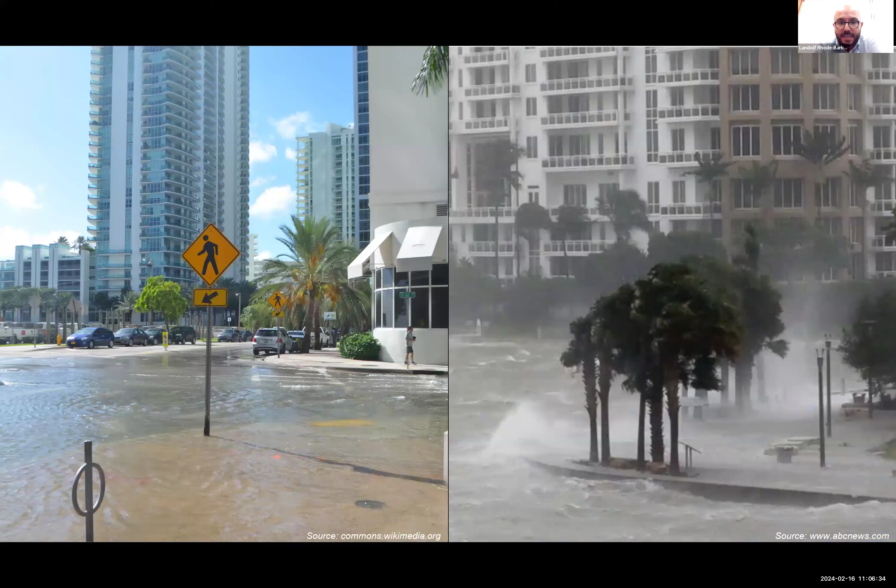Now, we living here know that sometimes this looks a little bit different, a little bit more terrifying, and now with climate change, things have been changing. We know that we have sunny day flooding, and we know that sometimes we have important storms that can cause important damages to the communities. So this is a wake-up call for everybody.

And for us here in Miami, and I would say in South Florida and a lot of other coastal communities, we start to live here, we start to live those impacts. So it becomes our everyday life. Luckily, we don't have important storms every day, but every year when you have to think about hurricane season, it's a reminder that things can change drastically.

And things have been changing, and we all know about climate change. For those who don't know, WHO considers climate change the #1 threat for humanity. So it's not only about what we think about climate, but in a broader sense it's a challenge for humanity. And the number of events, but also the cost of those events, has been increasing dramatically.

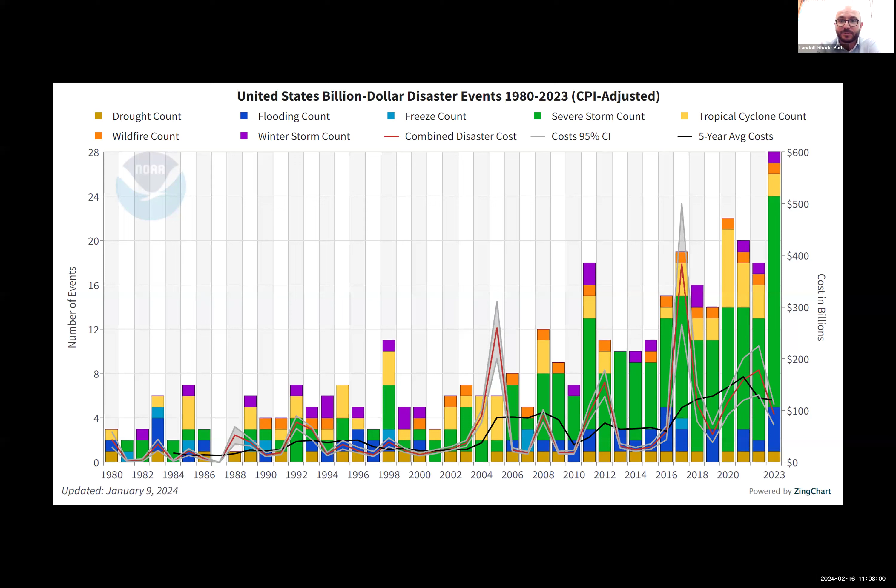So it's important to understand that things are changing and we have to act. This is the decade that we need to make change. We acknowledge that we're not on the right path right now, but we might still be able to recover, as all the reports are saying right now. And Florida is not in the best position, geographically, because of our hurricane-prone location. Here you can see NOAA's statistics in terms of billion-dollar disasters, highlighting the cyclones. The light yellow that you see there is reflecting exactly that we have a lot of storms that can come and cause a lot of damage here.

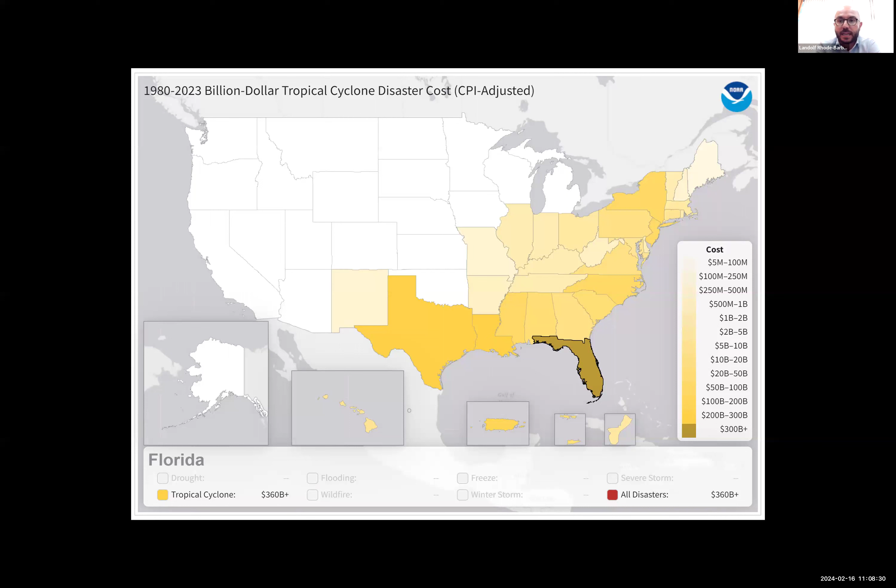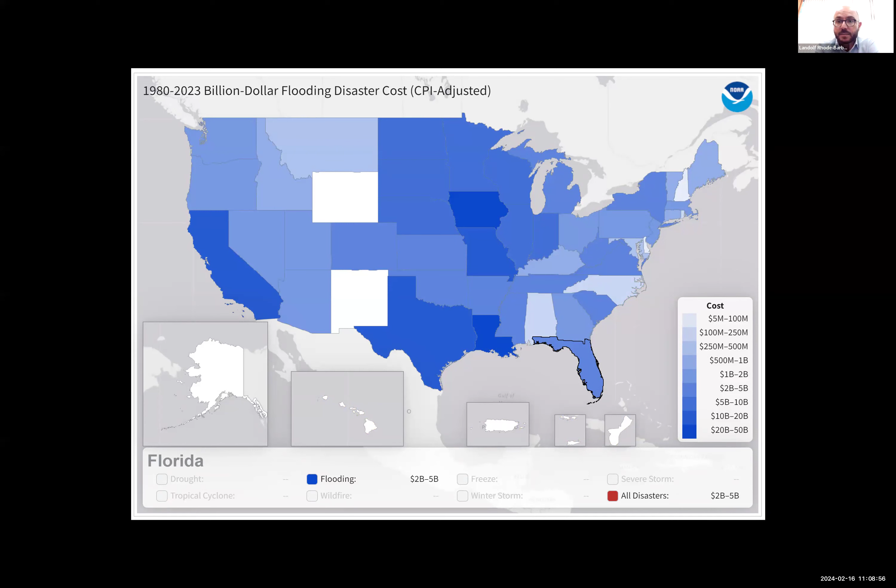Same thing with flooding, although this is flooding in the global sense. So you can see again that we're not the darkest there, but we have a nice blue shade there. Combining those, it's an important parameter for us to understand that we live in paradise, but sometimes that paradise is coming with some threats and some hazards related to the coastline.

And when we talk about those hazards, a lot of people think about flooding, and that map was just flooding. It's not just flooding. Flooding is basically something that we all perceive quite well, but then you have erosion, which is the removal of sediment, and that can cause even more damages, because if you remove the sediment, you might lose an entire structure by basically causing instabilities at the system level.

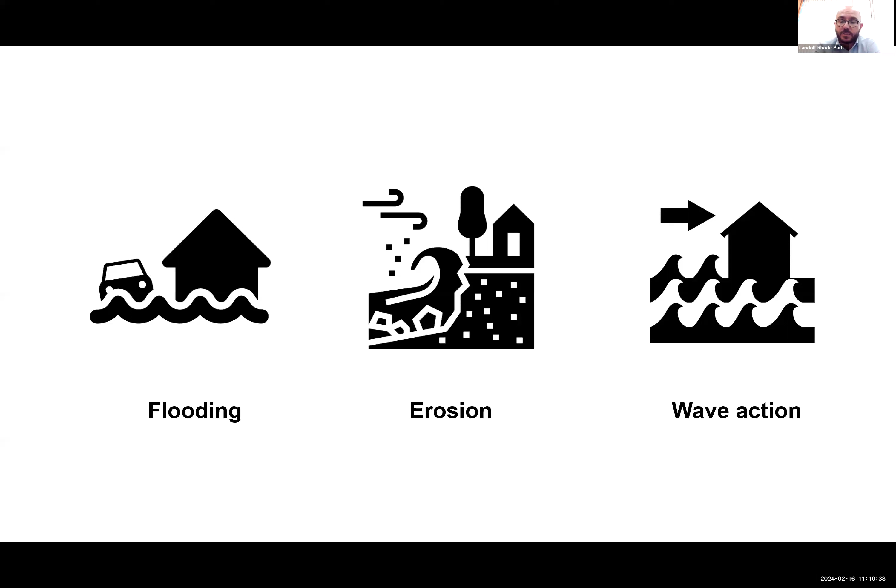And then we have wave action, which is basically the impact of the waves. I always come back to this analogy, but I think it is very important for us to understand why, while everybody talks about storm surge and flooding, it's not only about that—wave action is a critical component that amplifies indirectly flooding and erosion. Wave action is basically the energy and impact that the waves carry to the coastline. A little bit of physics and math there: maybe 4 cubic feet of water, 4 times 64 is approximately 260 pounds.

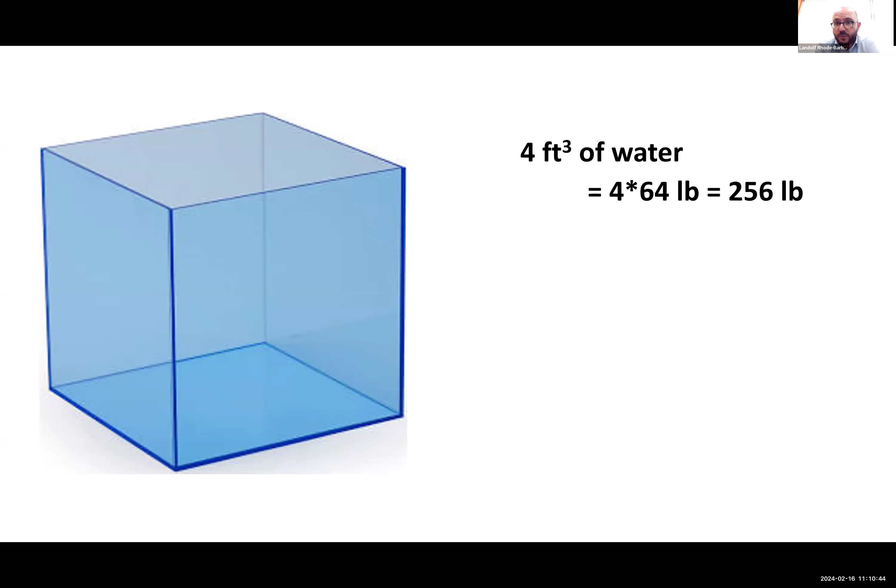And also, you know what else is around 260 pounds? Travis Kelce is listed at 6'5" and 250 pounds. So if you think about Travis Kelce coming and tackling you or stopping you from running, this is a terrifying thought. But I think this allows us to understand what could be the devastating impact of large waves. And again, it's not one player only—imagine that the sea is a sea of players. So the impact we can have from the waves is really, really important.

So that energy, that force, needs to be challenged and needs to be channeled somewhere else. Luckily, here in South Florida and in a lot of other communities, the environment is protecting us.

So this is a great image where you can see basically our peninsula, and you can see also what is, I would say, our number one defense. So we start with the coral reefs, and then we have other defense ecosystems like mangroves in our region. Seagrass is also helping a little bit, and then in other regions there are oysters. So again, nature itself is protecting us to a certain extent.

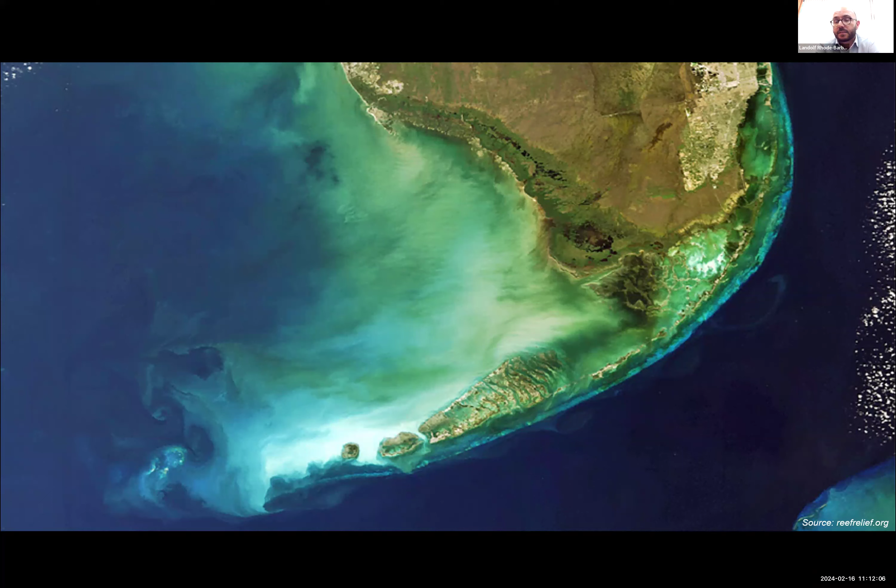So what happens with the coral reefs and the mangroves is they dissipate the wave energy before it reaches our shoreline. There are studies out there that have shown that the impact of coral reefs is quite important—they can dissipate up to 97% of the wave energy. And there are other studies that show they offer us protection benefits on the order of hundreds of millions, and in some cases this could be in the order of billions when the storms are important.

Same thing with the mangroves—the mangroves and their complex structure dissipate the wave energy. There are studies that show that approximately 300 feet of adult mangroves can dissipate up to 66% of wave energy. So having healthy coral reefs and a well-established mangrove forest along our shoreline definitely protects our coastline.

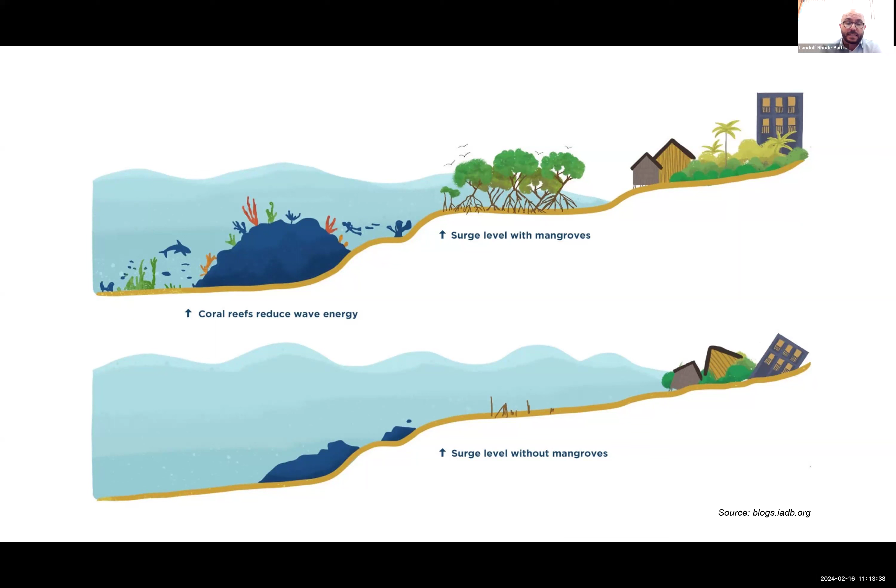And unfortunately, we know about the conditions of our coastline, the coral reefs, and the mangroves right now. And that is what we pay in terms of having the structure basically sustaining the wave energy directly, not being dissipated away from the shoreline. So the implications of that is what we're talking about today.

So if we are to analyze a little bit how this is happening, especially for coral reefs, we need to talk about the mechanisms that dissipate that wave energy. Here I'm highlighting that equation from the 1980s, which is about the wave energy flux. There are actually three parameters there, but two are the most important. One is about wave breaking, which is basically the wave forming and dissipating by that instability that we call wave breaking.

So as the particles of water advance, this instability occurs and the wave will break. So the kinetic energy will be dissipated in a very efficient and drastic way. And you also have the friction on the bottom, which comes through the complex structure that the corals create and all that rugosity and drag that goes with that. So these two parameters are critical for us.

And of course, losing the reefs means losing structural complexity—you lose structure basically, so you don't induce as much wave breaking and you lose friction. That is what allows the waves to propagate to a bigger extent. And of course, when we have storms with storm surge, the efficiency of those parameters is also changing.

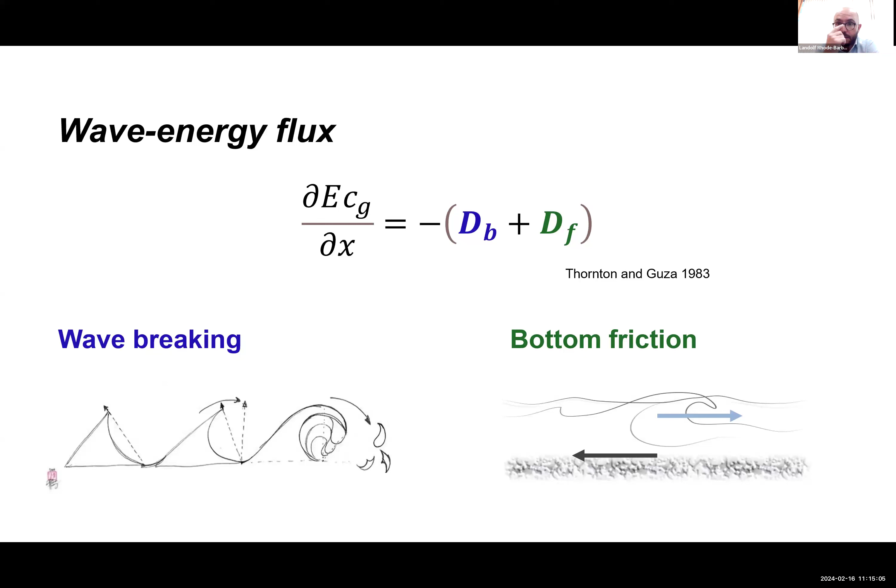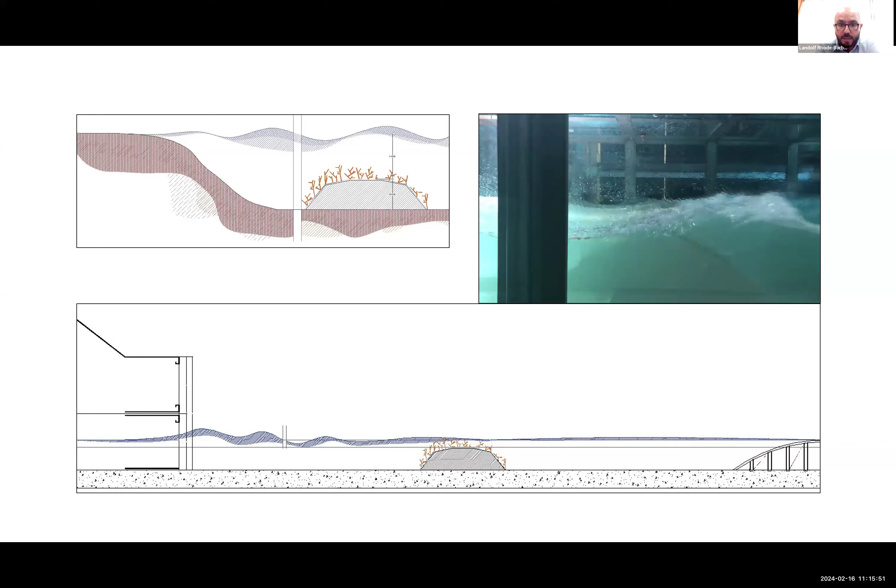We took measurements before and after, and we also did something quite unique: we ran the same model without the coral skeletons and the same model with the coral skeletons, trying to isolate exactly the impact of those coral skeletons.

So what we quantified is the percentage of wave energy dissipation provided by the coral skeletons. With the staghorn corals, we were able to show they can provide up to 60% more wave energy dissipation compared to the bare reef model on the left side. Quantifying this and giving numbers is critical, not only for making the argument, but also for understanding and tailoring expectations.

In the scientific community we understand some things, but when we communicate to stakeholders it's important to educate them that coral reefs protect us, but the performance fluctuates because it depends on multiple parameters - not only the corals and structure, how big and dense they are, what type of corals, but also the depth, how big the waves are, and so on.

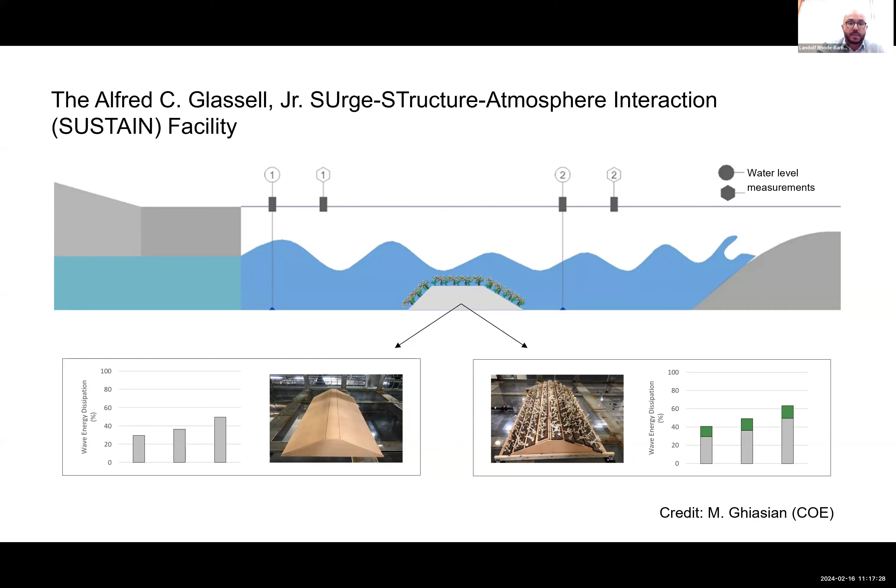So the hydrodynamic parameters that come into play are just as important as the structure itself. And we were able to test different structures and different corals.

Here you see a comparison between what we call brain corals - the rounded ones, which are a little more aerodynamic and, as expected, dissipate less energy - compared to the staghorn corals that are branching out. The complex structure of the branching corals creates more drag and dissipates more wave energy at the same density, so we compared the two.

Now there are interesting things there - I'm not the expert on this, but we can talk about which breaks first or which develops faster, and whether one outperforms the other. But studies like this allow us to make the argument for coral restoration for shoreline protection.

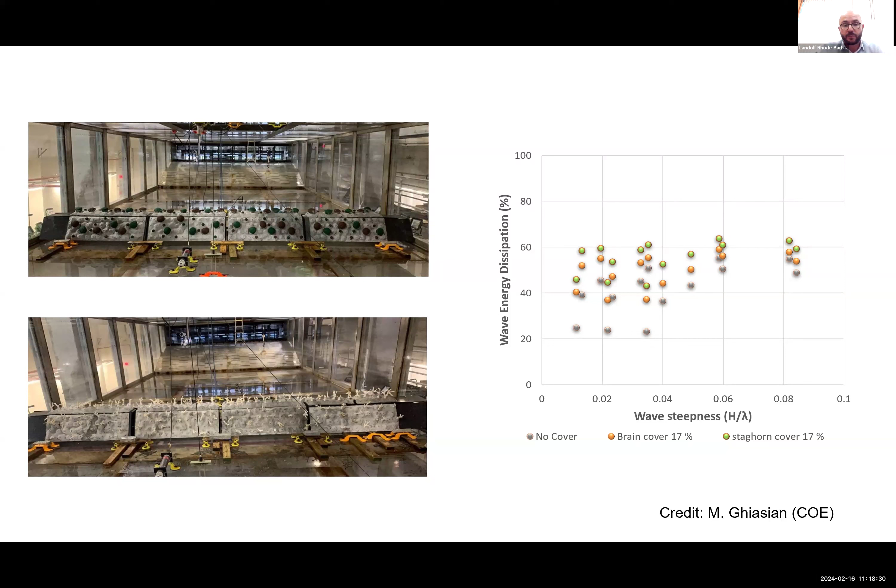So quantifying the impacts, how much we can get, what we should use - not only from the perspective of resilience of the coral, but also from the perspective of performance for shoreline protection - is very important.

So why are we talking about this? Where does SEAHIVE come in? Green infrastructure like corals and mangroves is vital because it provides protection and other ecosystem benefits. But let's focus a little on protection.

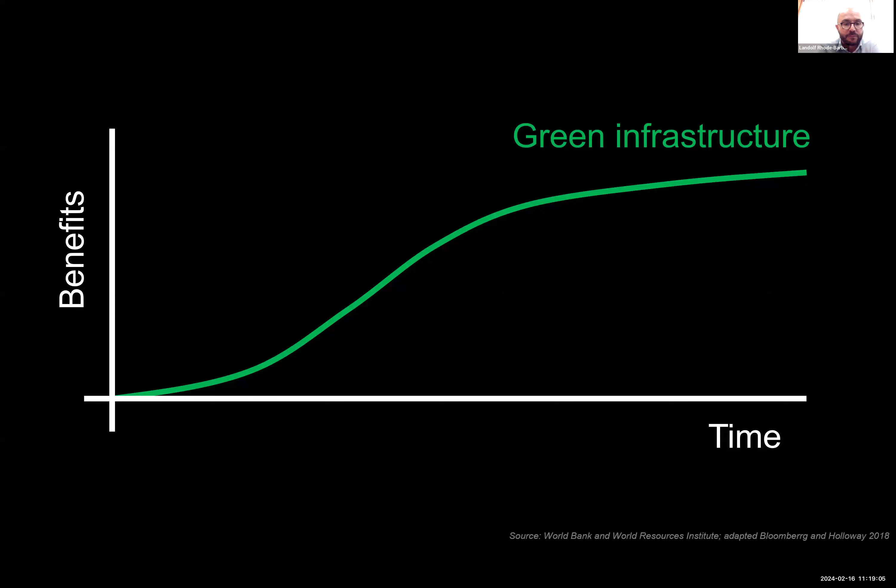The issue with green infrastructure is that it takes time to develop, and there are a million parameters that affect its development - natural parameters we don't control. Our gray infrastructure, on the other side, is established in a certain, shorter time through the construction process, and then yes, it degrades, but it's a little less sensitive to fluctuation of those parameters.

We cannot simply compare, and I'm not defending gray infrastructure over green. What I'm saying is that gray infrastructure allows us to get the baseline performance in a shorter period because of the construction. If we could actually get those two to merge, that would be ideal, because then you'd have all the ecosystem benefits and other protective benefits from regeneration that could add to the gray infrastructure.

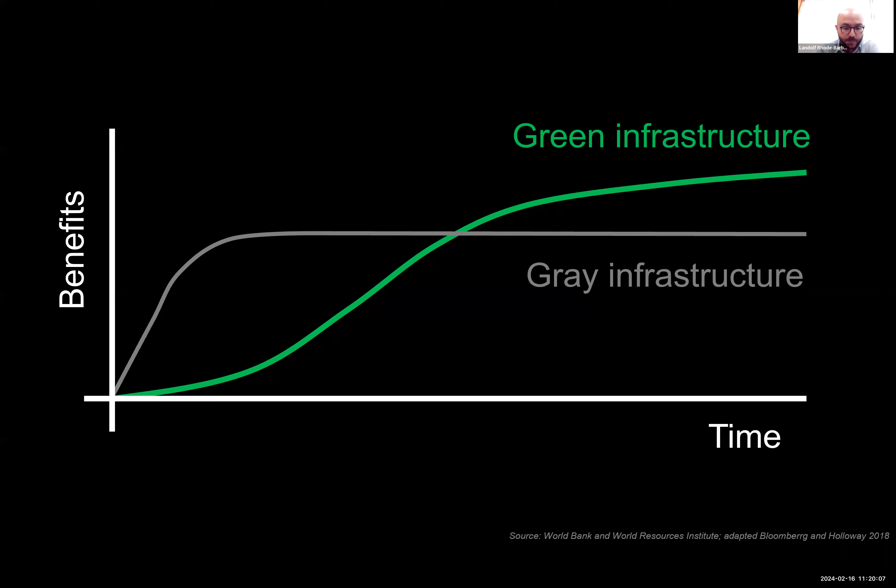So it's not one versus the other, but rather how we can do this together. This is what I would call the holy grail of coastal infrastructure and sustainable development: how can we develop protective structures that not only dissipate wave energy and protect us from the impacts of waves, but also create habitat?

And creating habitat means integrating different ecosystems. This could be seagrass, oyster reefs, coral reefs, or mangroves. Depending on the region, this will change shape.

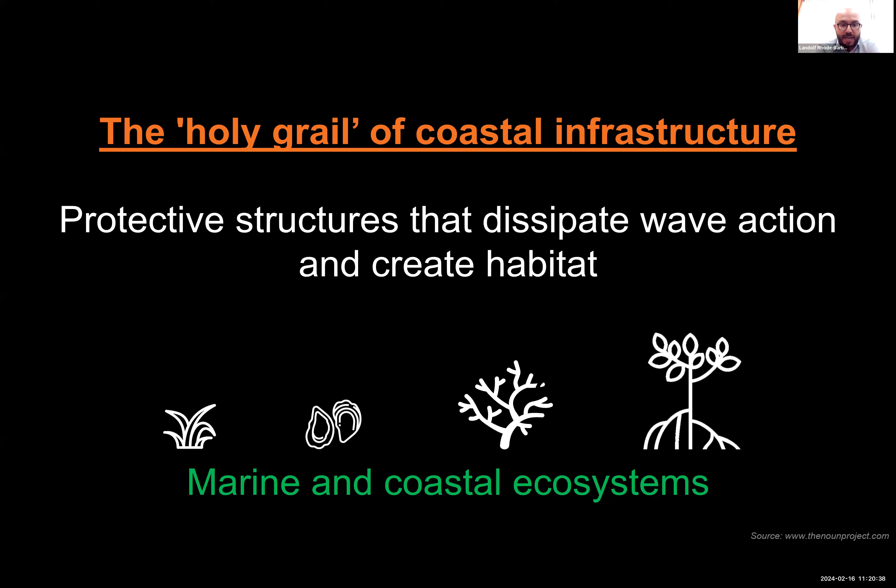Why this is the holy grail, and why I think this is quite a new challenge for us, is because we have always been designing with humanity at the center. We've been designing structures because of us, the way we think about structures and the way we want to use them. We define structures the way we like them, using forms that work with our activities and materials that we developed, that we can live inside and that protect us. But at the same time, this is quite unique if you start thinking about this layout with respect to nature.

So there is a change in the paradigm. Now what we need to do is basically put nature in the center, and that is the big challenge. There are no design guidelines about how to do that the right way. So we need to rethink basically our entire way of designing structures and infrastructure, and that causes a lot of challenges.

So we need to think about the structure and how it will interact with nature, the forms we will adopt, and which forms nature will use and for which purposes. The materials have to be such that nature can populate them, or at least they're not harmful. And there are also forces there.

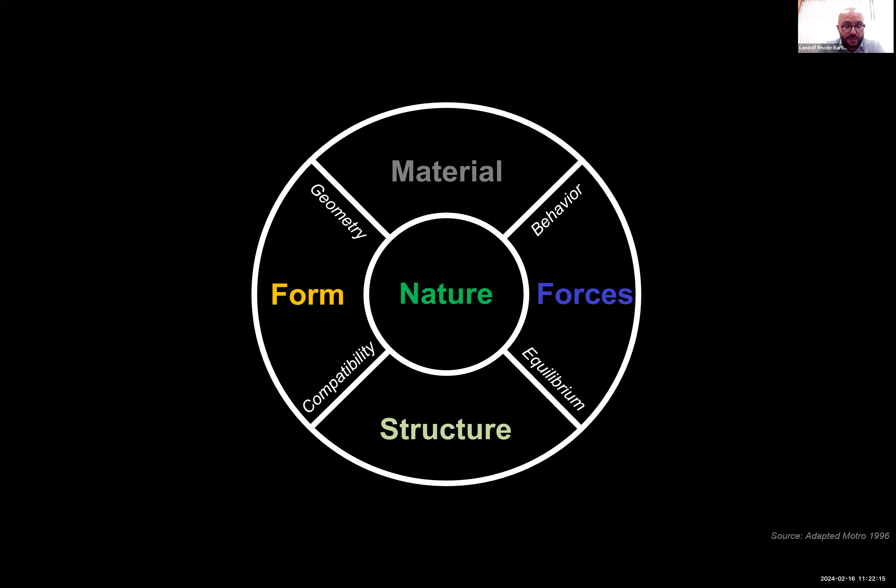This framework comes from one of my advisors, who was using it to evaluate structures and landmarks, and it also has another, let's say, outer level.

Now we have technology and technological advancements at all levels, from structures and forms. Now we can create free-form structures, and we have advanced materials with unique properties, and we can do a lot more simulations. We can use forces in a different way.

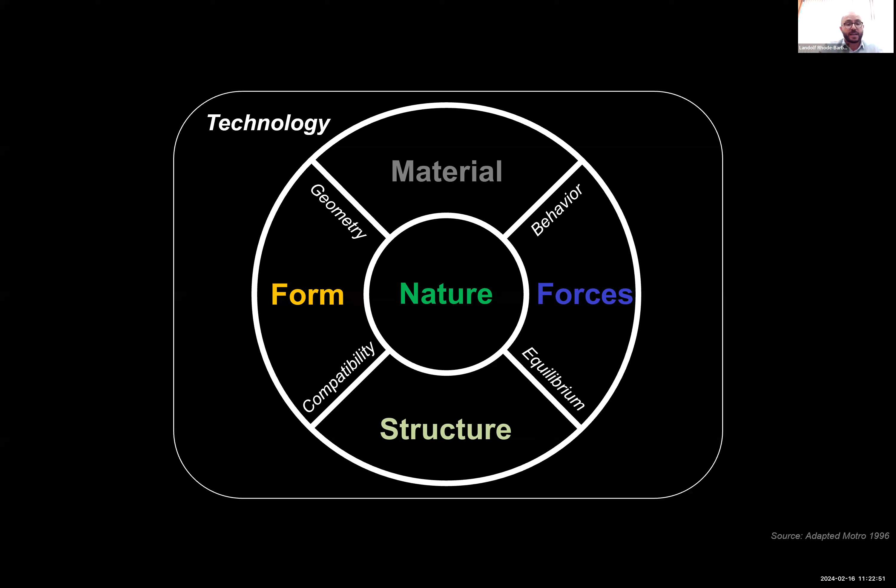But the fact that we have all these advancements does not necessarily qualify them for us to use. It's not because we can that we should. So there's this rationalization that we need to have.

A lot of times in architecture, this is a debate about what we do and how we do it. Coming from the engineering side, and a little bit more on the form-follows-function principles, I think this is a very important part of this discussion.

So the rationalization of the form, the material, the forces, and the structure is very important, because we want to create something which is robust, scalable, sustainable, and also equitable—in the sense that if we want to deploy something at a larger scale, that's where things become very challenging.

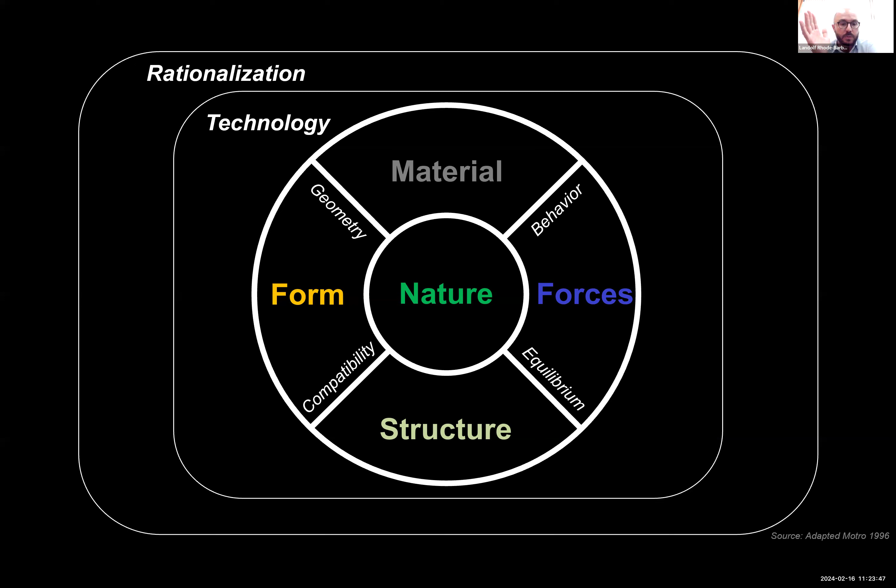So it's not only about creating something at the state of the art. There could be solutions that are very simple that we can integrate and still have a large impact.

Now, this is how I see SEAHIVE. SEAHIVE was developed through discussions that we had here at the department, and I'll give you a timeline. It was a collaborative effort.

Tony Nanni, our chair, Steve Nolan from the Florida DOT, Brian Haus, Prannoy on the material side, and Esber were all involved. We had discussions about what SEAHIVE actually means and how we get there. SEAHIVE is known for its hexagonal form, reflecting the beehive—so we use the hexagonal form.

I'll show you some figures around the development of the form. The idea was that the hexagonal form should have advantages, not only because it distributes material in an efficient way, but also because it allows us to create continuous tiling. The fact that we can create tessellations without gaps enhances the stability.

Then we have perforations on the sides that we've been trying to understand and tailor to the hydrodynamic conditions, allowing water to go in and dissipate the wave energy.

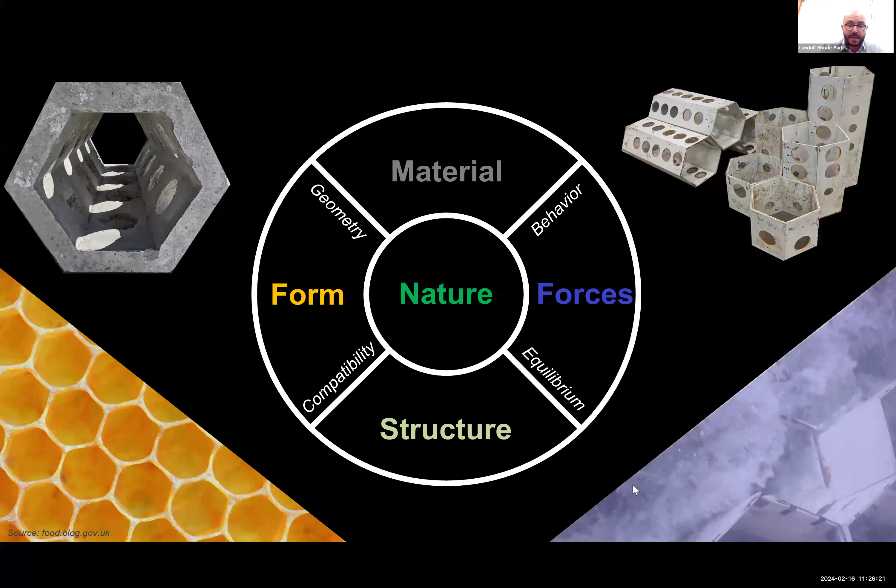So doing simulations and quantifying what would be the impact of the forces and how these structures interact with the waves. So this is a timeline of SEAHIVE, and there is sometimes a little bit of confusion, but SEAHIVE was

funded in 2018 through the National Cooperative Highway Research Program in collaboration with the Florida DOT. That was back in 2018. Throughout 2020, we did the testing in SUSTAIN. In 2021, we secured some pilot projects here in South Florida. And now the last year we deployed two, and we have one more currently in preparation for deployment, with some more to deploy.

There are some new sites that we're going after. Now, SEAHIVE, quickly we realized that it's not only a revetment. So when SEAHIVE was first funded, the idea was to develop a sustainable and efficient, in terms of hydrodynamic performance, revetment. And revetment refers to those sloping structures.

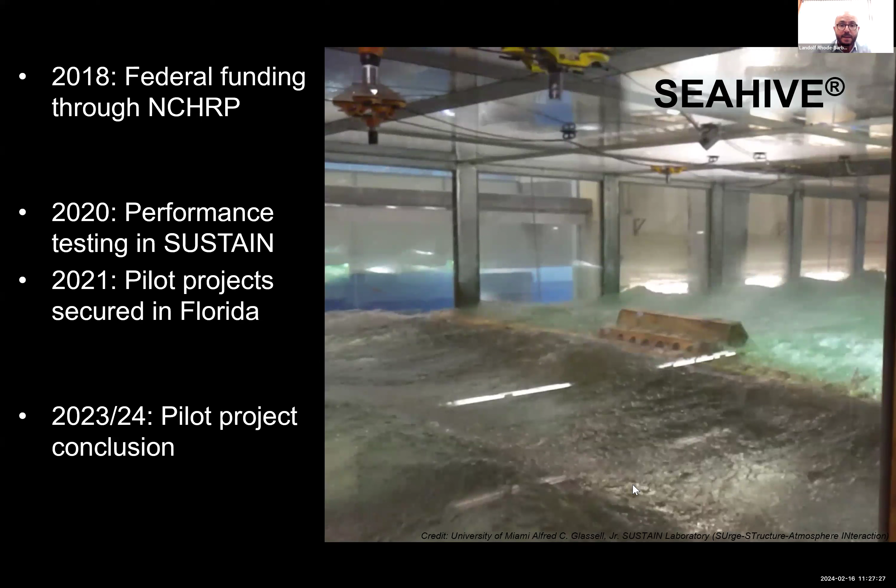But SEAHIVE actually intersected with other projects. One of those was in 2019, a U-Link project on coral reefs. This was kind of like a first initiative from the University of Miami, bringing different people together. I had the pleasure, and I'm still working more and more with them, to work with Diego Lirman, Andrew Baker, and Brian Haus, and others later on this adventure around coral reefs.

So we were talking about the impact of corals, and we soon understood that developing a coral reef just with corals will take some time. So we shifted towards hybrid coral reefs. That's where SUSTAIN was a critical infrastructure component, because we were doing testing for SEAHIVE, and then we were doing testing for coral reefs. So then why not combine the two? And that's how the idea of using SEAHIVEs for coral reefs was born.

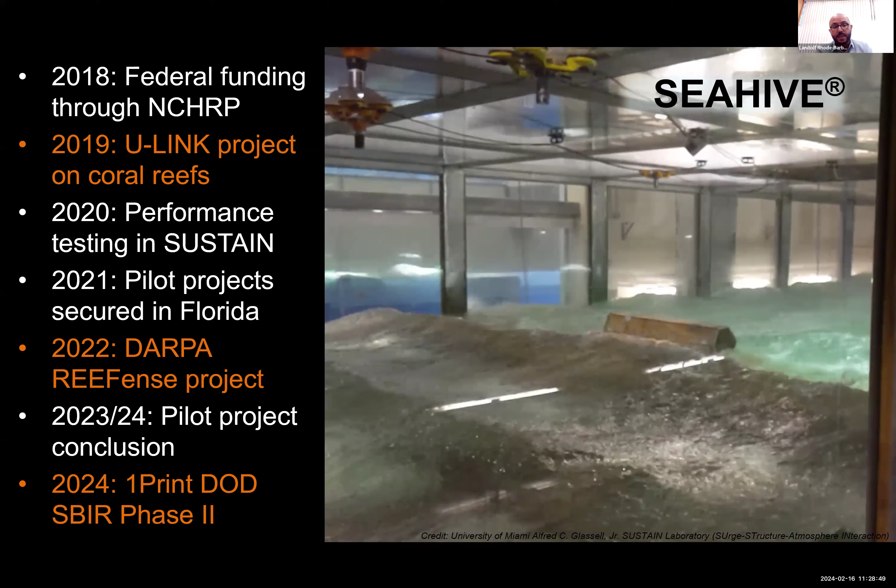Then in 2022, there is the DARPA REEFense project that you might be aware of. This is the largest of the hybrid coral reef projects that we have. And more recently, now in 2024, we have a DoD SBIR phase 2. This is with 1Print on basically 3D printing concrete hybrid structures like SEAHIVE.

So going back to the original project, we didn't go directly with the hexagonal shape. We actually tested different shapes. We tested square, we tested round shapes, we tested the hexagonal, and we tested different perforations, both in terms of the porosity, changing the porosity, but also changing the way you get that porosity.

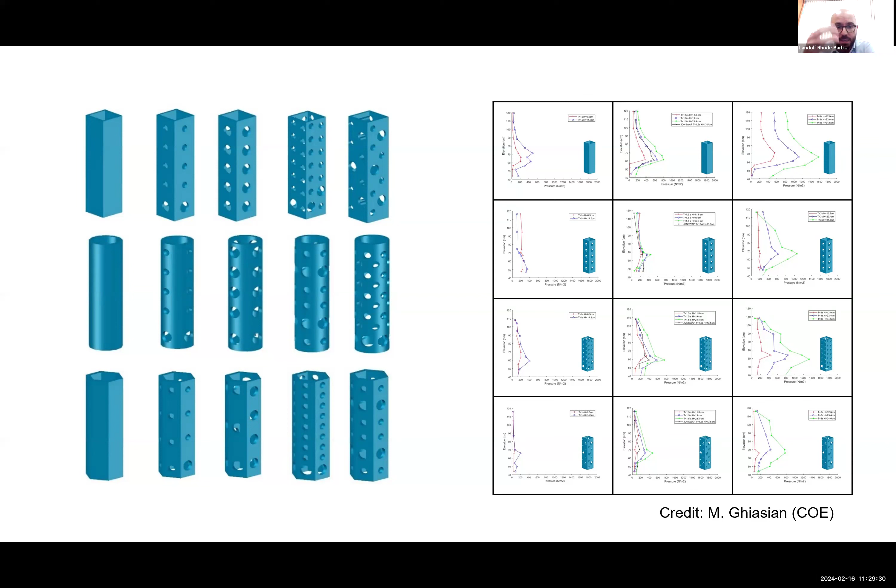And we were doing some testing of the pressure and the impact of the waves. But of course, having only a monopile there is not the right way to go because you need a system behavior. So then we started focusing on different systems and how we actually populate a structure using a modular unit like those hexagonal piles.

And here you see some of the testing that we did. We did this at different scales. We were measuring the wave height before it reaches the structure, after it bounces back, and if it's a fully perforated model, what happens after.

We were able to show that the relative wave energy dissipation you get from a SEAHIVE model versus a traditional solid seawall is a lot more, because the perforations allow the water to go in and dissipate, but also reflect less. So because of the geometry of SEAHIVE, you have better reflection and dissipation.

So we were able to quantify this for different wave characteristics, different depth conditions. We were playing with different parameters. That's the uniqueness of having something like SUSTAIN. You can create your own conditions, you can create extreme conditions, or play with one wave and see directly what is happening there.

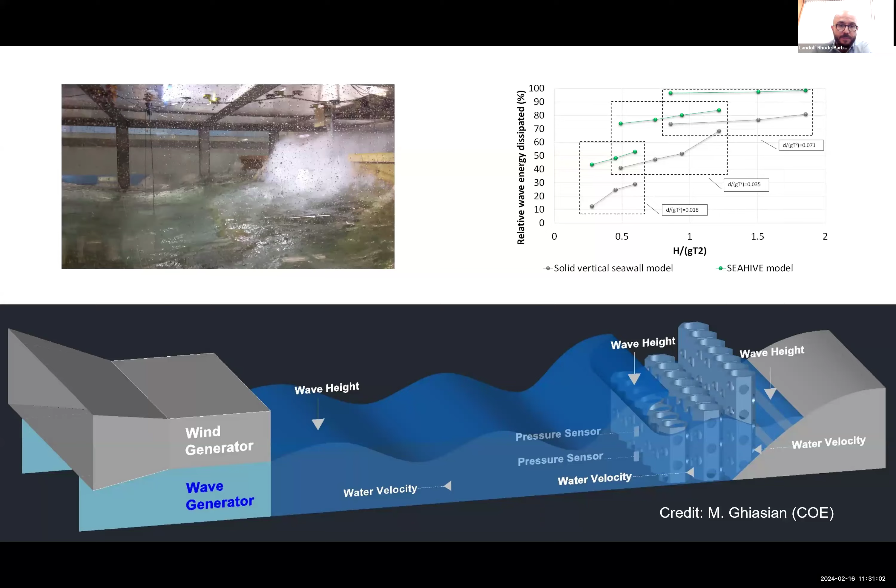And on the pilot side, we had the opportunity to deploy what we called ECoREEF. ECoREEF was the outcome of that idea of hybrid coral reefs. This is how we imagine it at some point. There are two types of structures, and there are also these trapezoidal structures that you see in the background.

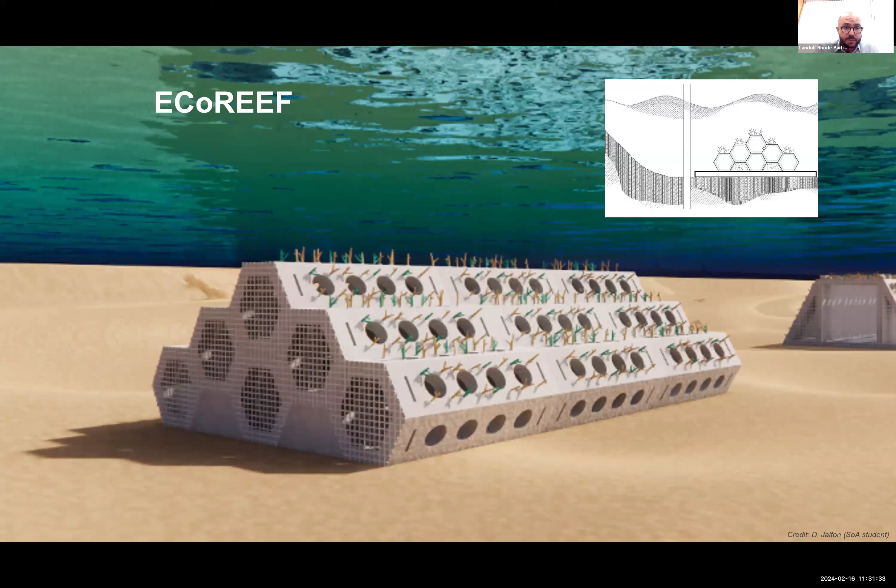But it's not like that anymore. The good thing, as some of our colleagues like to say, is these are really nice fish aggregation devices. Shortly after installation, the fish love it.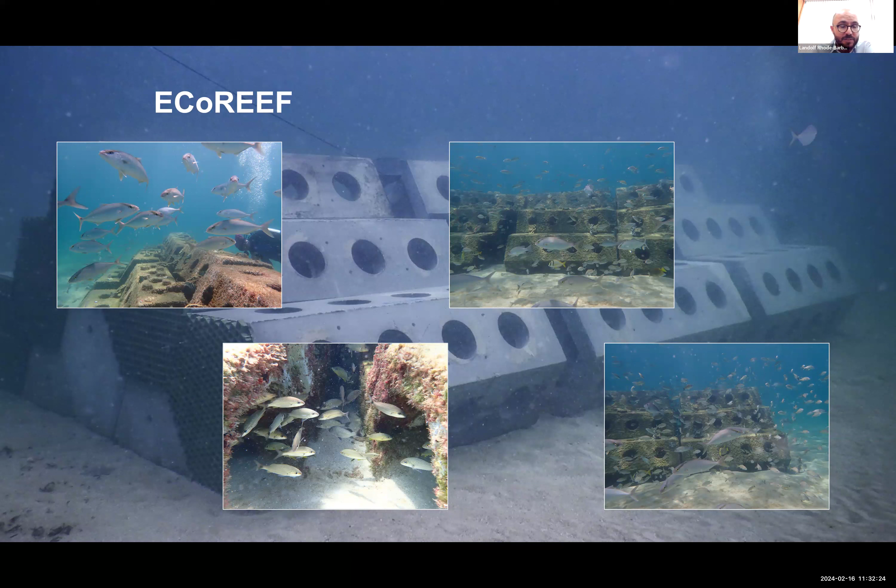It creates habitat for them because of the structural complexity that we have. You can see that we moved a little bit. This is all natural - it's a small installation. We're learning a lot of things, but what's interesting is that it starts to create habitat. I asked Diego to give me a little bit of what they've been observing on that site.

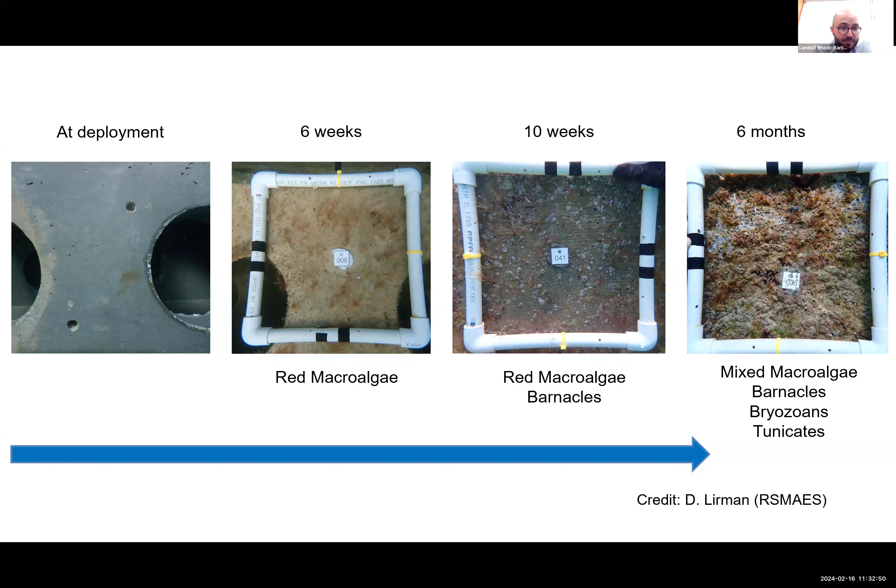You can see here a little bit of the recruitment, and of course there are different algae and barnacles developing there, populating the surface of those structures. So you can see how clean it was at deployment and how different it is right now.

We're also doing this with the purpose of creating a living reef. So the team from Rosenstiel has been deploying different corals, and here you can see how these corals are growing.

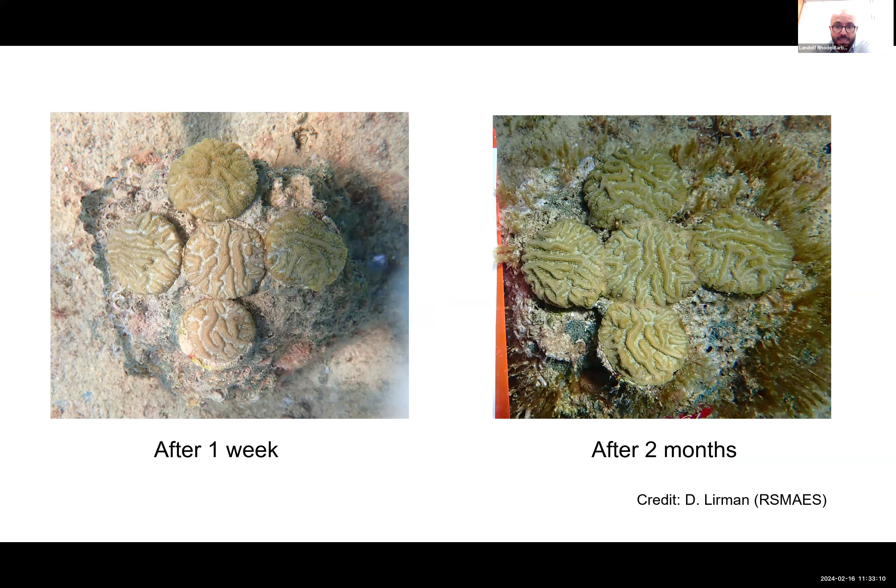We also have, I would say, good results with respect to the survivorship, especially after the extreme temperatures that we saw last year. I'm not the expert to talk about this, but I think it's very important to talk about the ecological wins that come with projects like this.

And the corals are doing great. The structure is providing the necessary platform, and this is something that we're really proud to report.

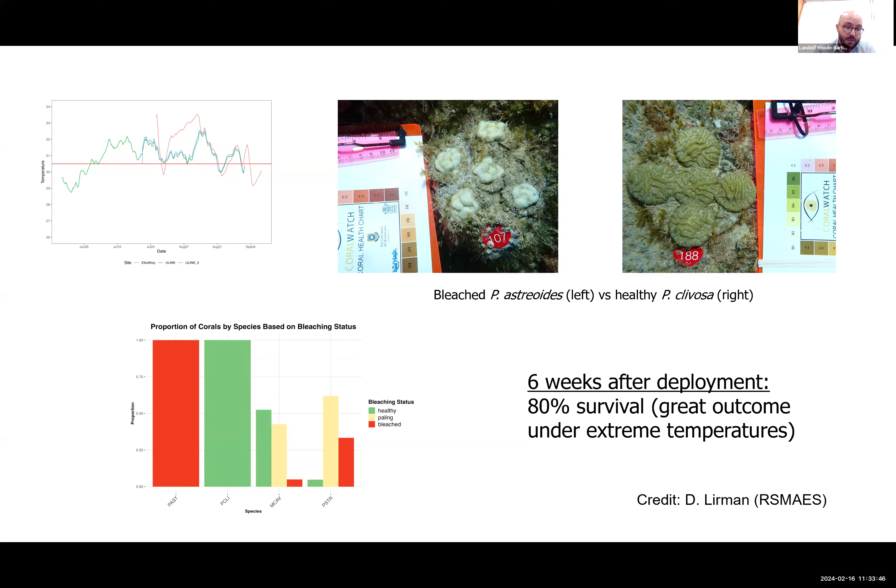Again, this is an experiment, so success is not yet guaranteed. I think we're learning a lot of things, and we will go back to the drawing board and reshape some of this to have better results.

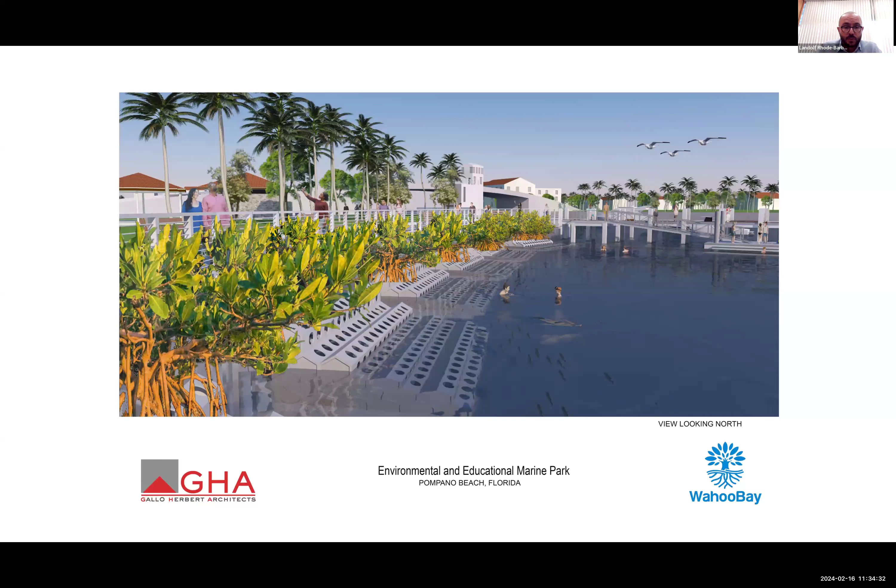The other project that I want to highlight is Wahoo Bay, which is shown here from this rendering. Wahoo Bay is a community marine park. We got into this project through the SEAHIVE expert panel. The county had this idea of creating this marine park with Shipwreck Park in the city of Pompano Beach.

And they were going to implement large culverts. I think they were intending to have a series of them with 10 feet diameter, which they were going to put there, fill in with sediment, and then plant mangroves.

If you want to create something, typically you need a sloping structure so that you have enough stability to support the weight of the soil and sediment that you put in there. So creating something with less footprint is very important.

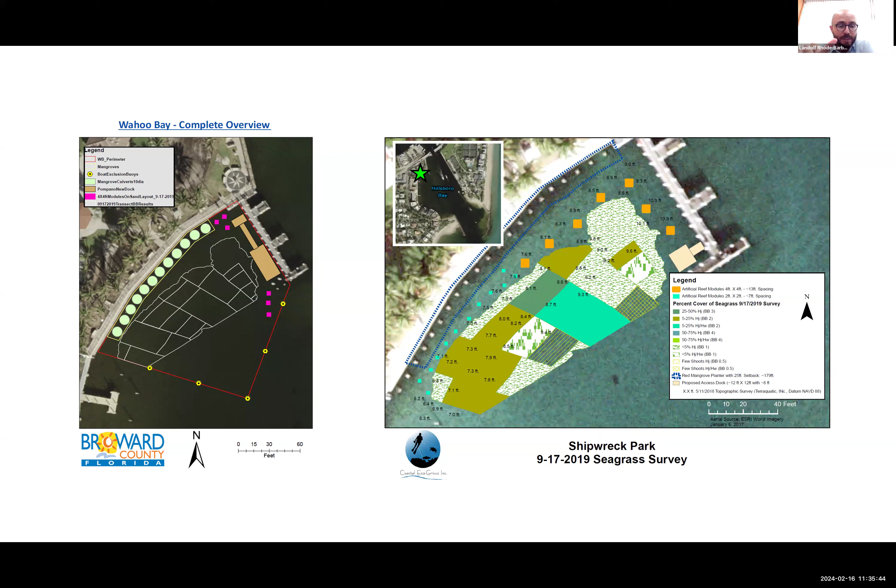This is actually one condition that we find in a lot of our canals and around our coastline, because typically our canals are quite deep. So creating that sloping structure requires a long footprint.

This is what we proposed to the community in terms of design: putting some solid SEAHIVEs at the bottom, reaching the level of the intertidal zone so that we can have the mangroves develop there, creating that protection to a certain extent with limited footprint. So this was well received.

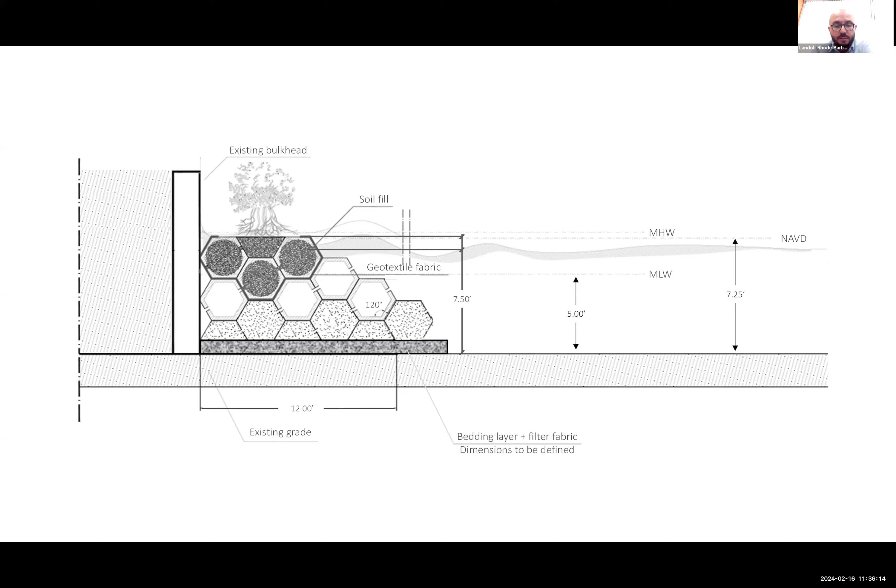So jumping now into the installation - but before you go into the installation of any pilot project, there is a big leap, which is all about permitting and discussing with stakeholders, including the permitting agencies, about what you're trying to do, how you're going to do it, and compliance with the regulatory framework.

It is important to go through that exercise, which we did. It's not what we typically do, but it's a very informing exercise for what we call design.

It's not a regular construction project - not that I know regular construction projects, but it's important to understand this is quite unique. We don't have experience doing this for this type of units and installations. So working with the community, understanding how we can do that more efficiently, is really important.

We did some field surveys before and after the installation of the first part, and we're happy to report we see an impact directly. Fish are often used to assess biodiversity and the impact of a structure in the marine environment.

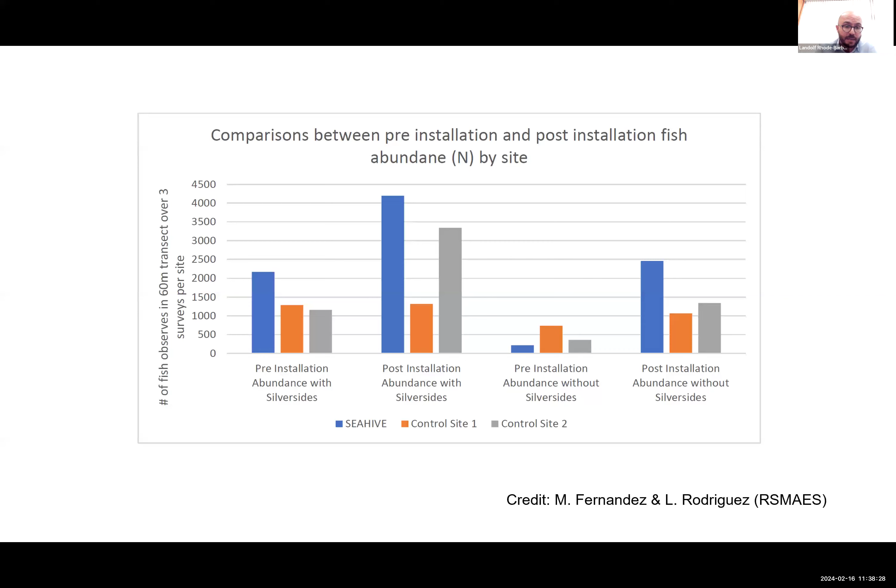Now, this is Wahoo Bay, and it's not only about creating something with respect to the built environment, but also creating something and communicating that to the community. This is an excellent exercise.

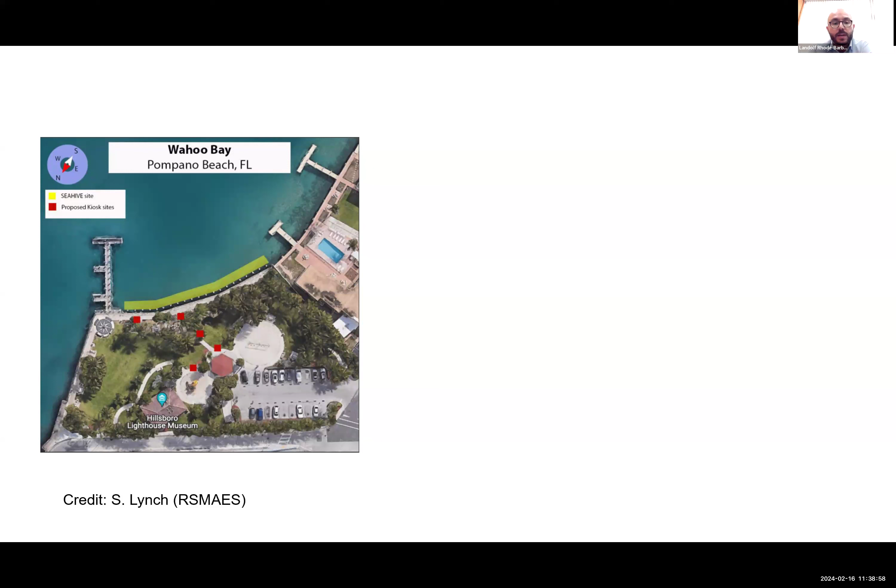Rafael Araujo, who is working with us on that side, we worked with one of his students and focused on the communication of what we're trying to do to the community. Sana created this nice layout of how we could communicate that within the park, so that when visitors come in, they can understand what we're trying to do.

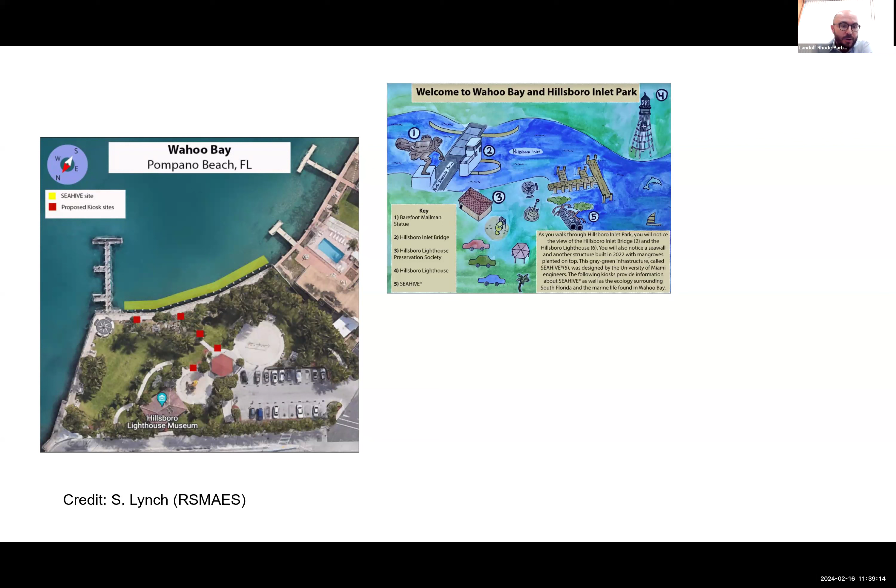It's not only about communicating where we are, but also what we're trying to do. We start by saying, what are the mangroves? Where are the mangroves? And providing information to the general public. You have to think the visitors are different ages, different backgrounds, so it's an excellent exercise. These are the drawings from Sana.

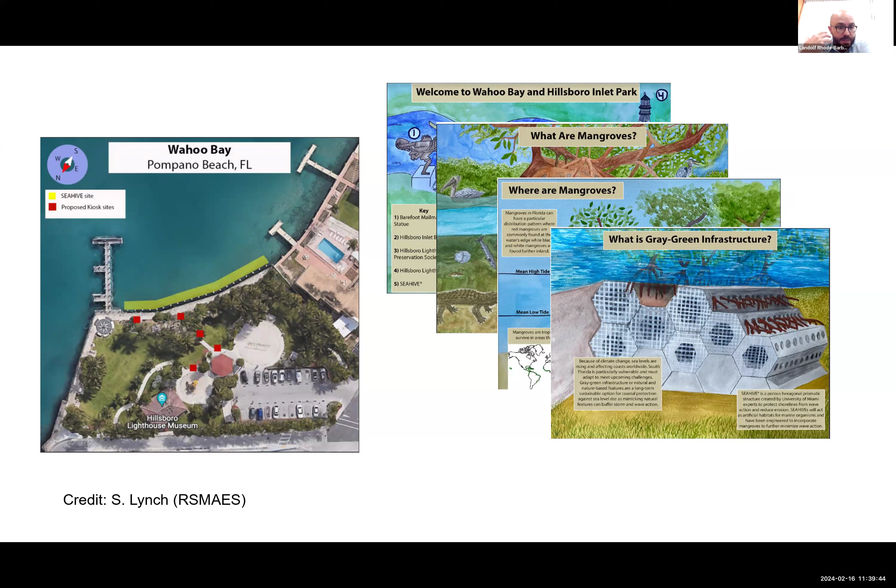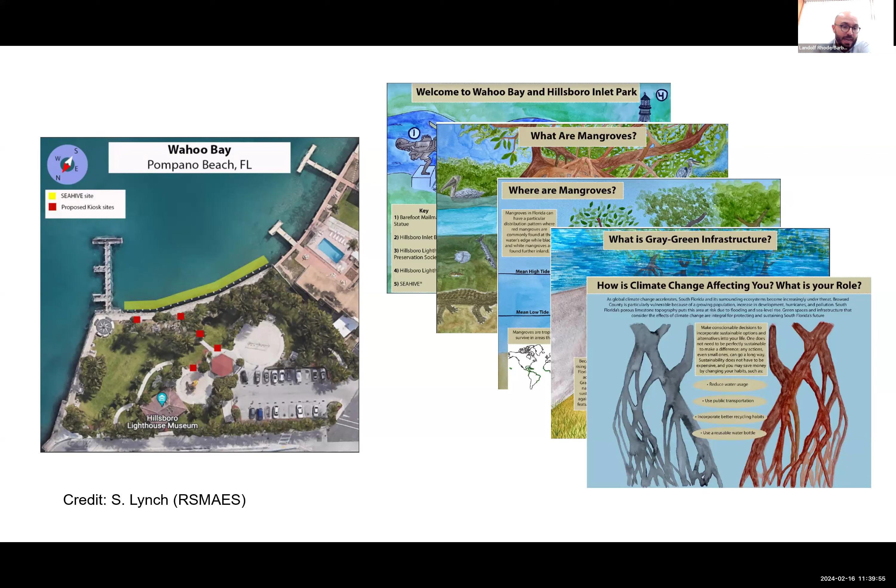Then, what is gray-green infrastructure? This is very important because when people understand, they experience the structure and the site in a different way. Of course, at the end you want to bring their attention to why we're doing this and why these efforts are important. But the most important thing, I argue, is to experience the park itself.

And this is what we did last week. We planted the first mangroves - you can see here, these are the mangroves, and we planted 4 of them on one section. We fill with sediment, we put the geotextile, we fill the sediment with gravel, sand, and soil. We brought the mangroves, put them there, and saw them surviving a couple of days through the high tide and low tide.

Everything went well, but sometimes working with the community has also some challenges. Sadly, the mangroves were no longer there this Monday, so we need to go back and replant.

Now, where we are today: SEAHIVE is a project that has built up and basically translated to other projects using the know-how we developed through the testing and those pilots. So now we can parameterize SEAHIVE with respect to the hydrodynamic conditions, and design SEAHIVE for different sites using different types of reinforcement and design variants.

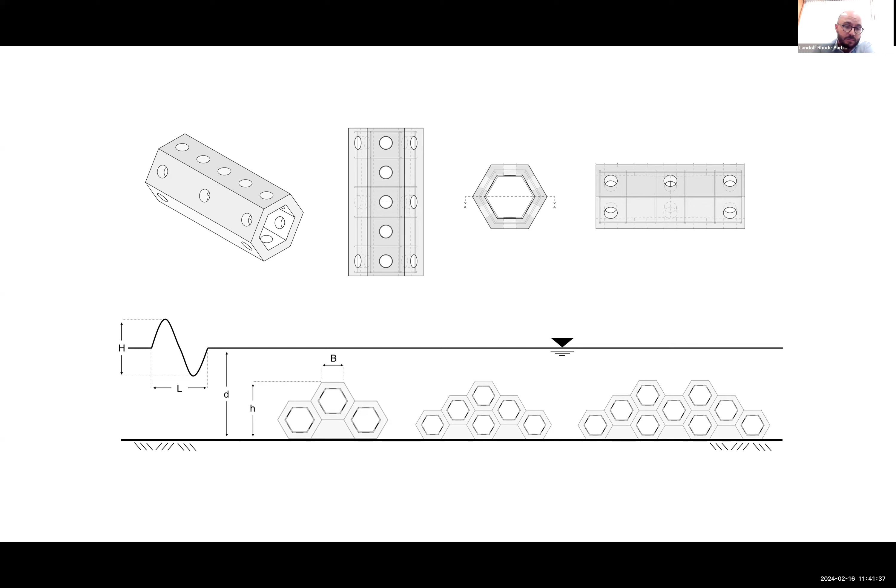So SEAHIVE is a concept that can be adapted to the performance we need in terms of protection, but also to the site conditions. Amin is doing testing on SEAHIVE - we have some people try to build SEAHIVE, some people try to break SEAHIVE.

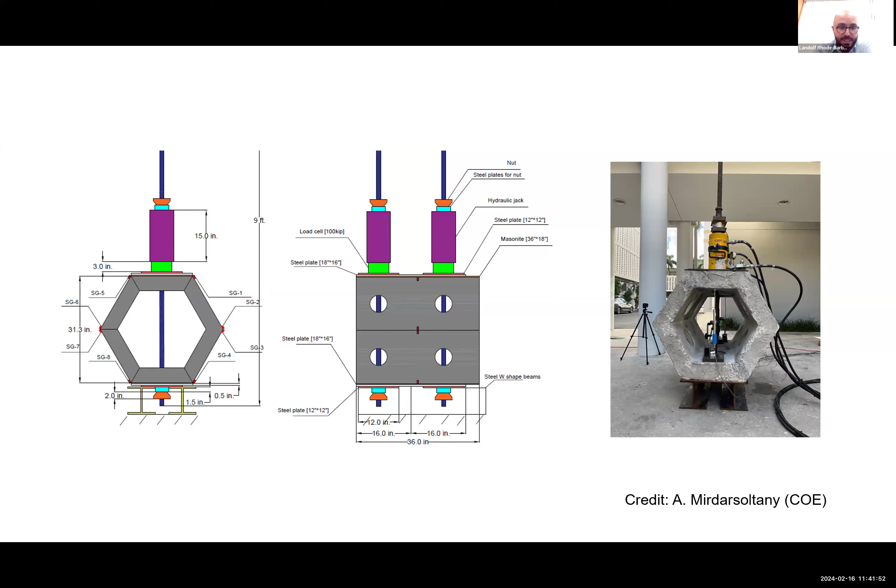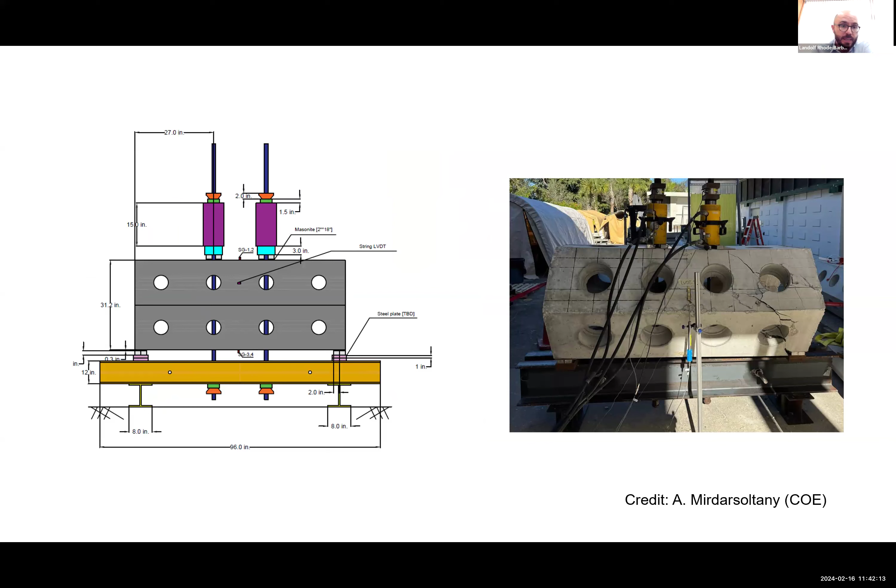It's not that easy either, but we're doing compressive tests and bending tests, trying to see how far we are between our theoretical design assumptions and the actual results we're getting with those units, and assessing the differences and where they come from. We're also trying to understand other parameters, part of the testing within the DARPA project. We're assessing different designs from solid to perforated, creating the lower and upper bound of performance. Having that porosity we can tailor gives us more wave energy dissipation.

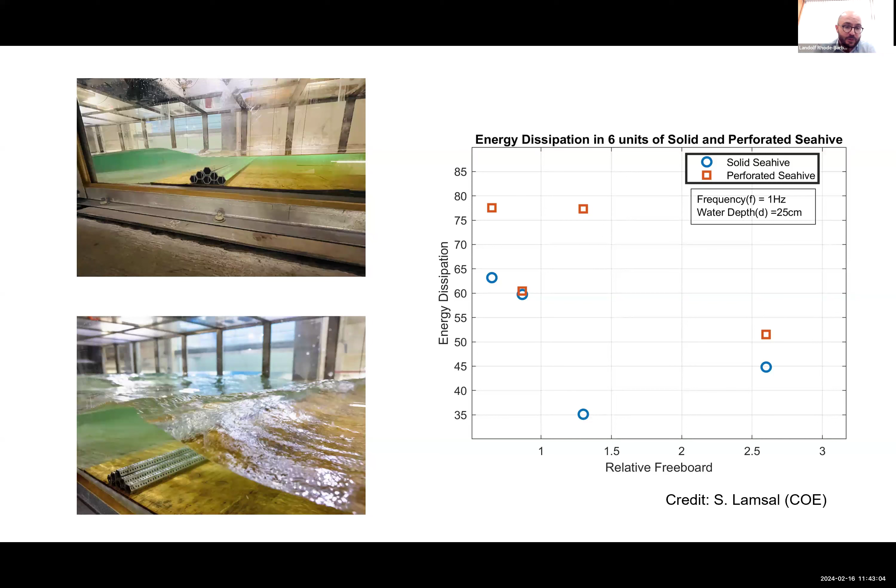What is occurring here is that the solid one is kind of like our lower bound, because it allows us to think about what would be the performance of those SEAHIVE installations if they become full of marine life and fully habitated by different organisms or sediment even. So it's not only about the design of the unit, it's also about how you use these units. And that is a critical aspect.

Within the project, we're also comparing different variants, different configurations. So here what you have is 3 times 6 units in terms of a SEAHIVE reef with certain distances versus 2 times 9 units. So the same amount of material in terms of units, and the same diameter and everything, but just distributed in a different way. This is an interesting exercise, but it allows us to quantify what is the performance and how we can use the units in a more efficient way.

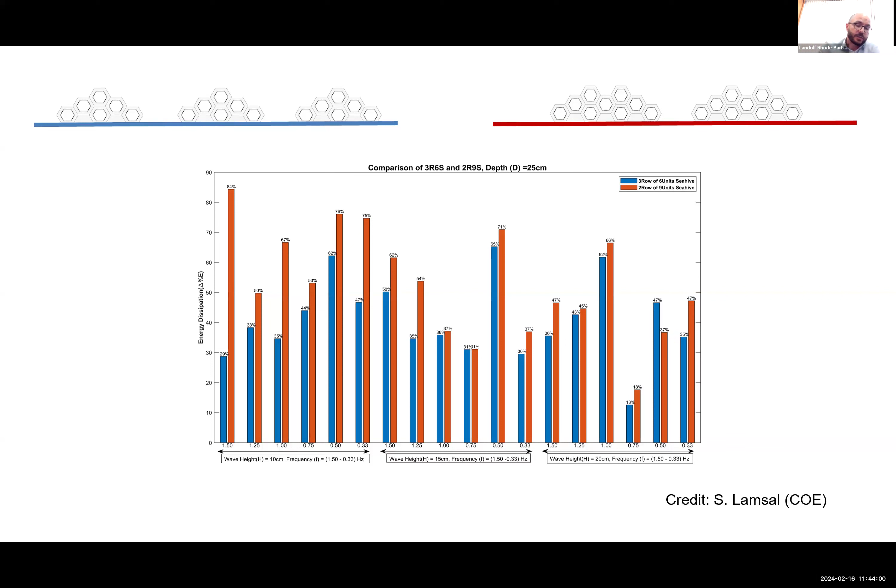There are a lot of tricky parameters there, the porosity being one of them, but also the distance that you put. So there are traditional design parameters such as the height of the structure or the crest width of your structure, but some of them are quite unique to SEAHIVE.

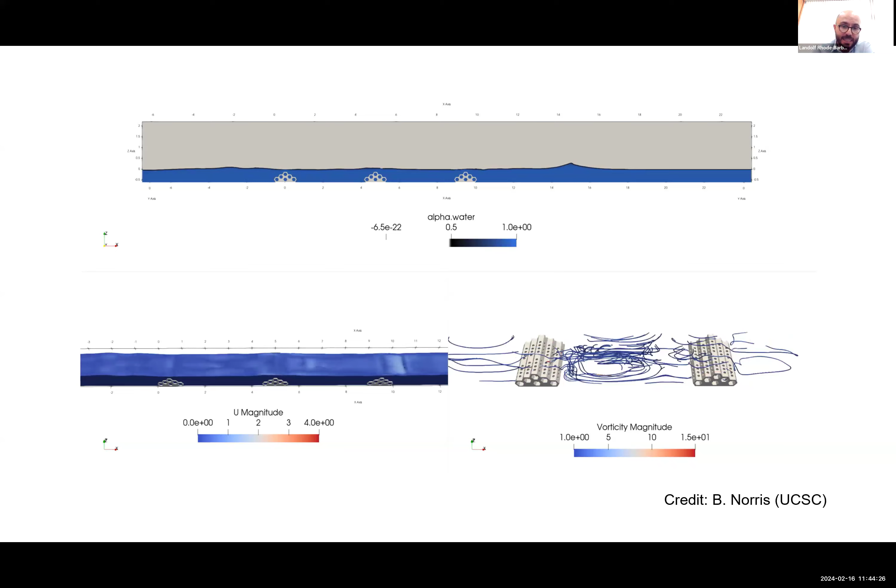To understand some of those, we do tests, but on other ones we rely on simulation. Our colleagues at UC Santa Cruz are doing simulations there, and they are helping us visualize how that wave structure interaction occurred for the SEAHIVEs. That scribble scrabble is basically the interaction between the 2 layers of SEAHIVE and how this wave energy dissipation occurs there. We're testing different structures, and these are variants that are coming through our project.

So we have a number of solutions, and SEAHIVE is working with other technologies, like the lattice structures that we have in our project, and we can create that substructure that creates that energy dissipation. Depending on the site, we can identify different solutions. The SEAHIVE structure there is acting like a dissipator for some configurations. For others, it's just providing the supportive need of the structure, creating substrate for the structure to actually reside there.

Creating that performance at different conditions with different variants is very important for us, because we can assess from a design perspective what we should use with different conditions.

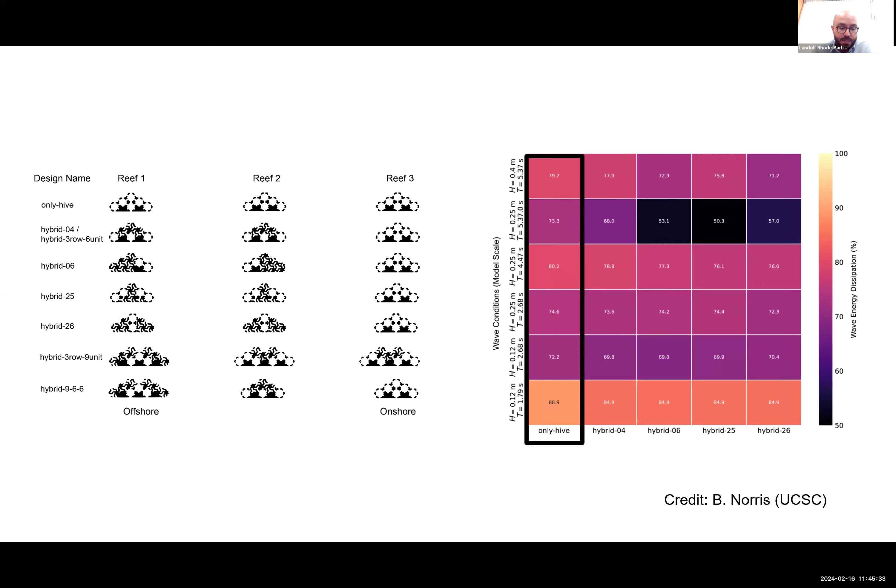So again, SEAHIVE gives you some performance, but we're trying to understand how we can get better, how we can advance not only on the technological side, but also on what would make sense to use in terms of that technology, coming back to that discussion of rationalization. There are a lot of advantages on going with new technologies, but there are also a lot of challenges. So the testing, the experimentation, and having pilots out there that we can actually assess for both engineering and ecological performance is critical for us. It also allows us to get techno-economic data that is very important if you want to translate these solutions.

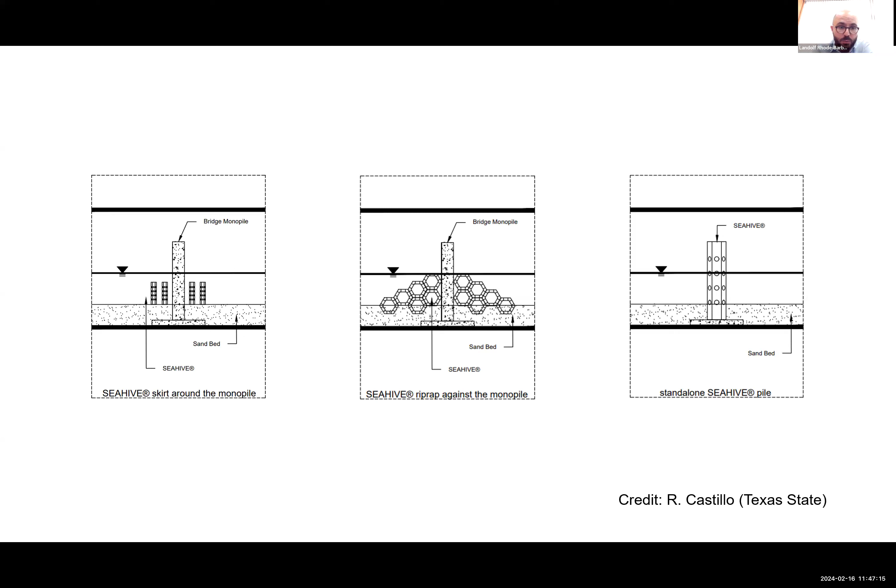This is basically our latest adventure on SEAHIVE, which is with Texas State, and this is part of a UTC that we're working on. This is SEAHIVE being used for scouring protection. So you have basically a monopile, and you create a SEAHIVE structure to protect the sediment, so you have no scouring. We're working on a little bit of that right now with our partners there.

As you understand, we're starting to see the light at the end of the tunnel, but the tunnel is not so dark either. We have a lot of good partners there, and we've had a lot of good time. Brian there has been critical, along with Pranoy, Esber, Tony, Steve Nolan, and a lot of others. The communities also who support us, who allow us to actually deploy and have those pilots, that is what we call SEAHIVE today. So there's a lot of people and organizations to thank for this. I think we're not yet done with SEAHIVE, but that's basically the success story of SEAHIVE, an evolving project that has reached a little bit more than what we expected at the beginning.